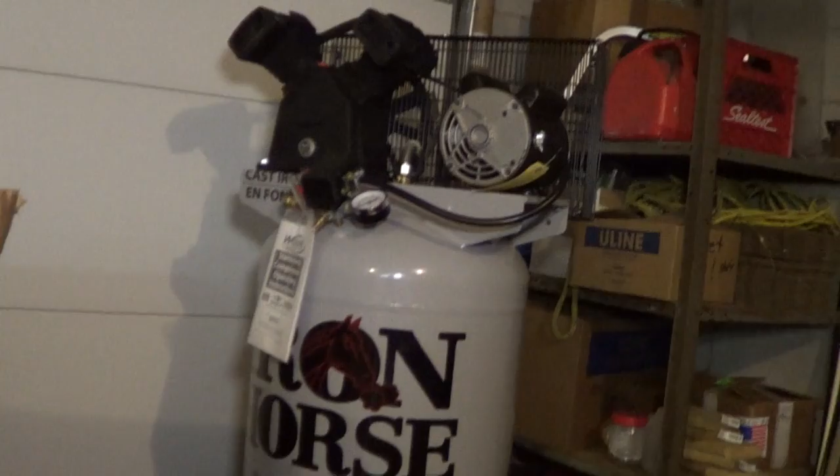My local TSC store, farm supply basically, had these guys on blowout, and so I got it for 35% off. Cannot complain. Retail $800, got it for $500. Love it. So I got to get the electrician to come in tomorrow because it runs on 240 volt.

He put in that breaker box over there when I got the Tormach, but he only put in plugs on this side of the wall. And I want to put the air compressor over here, so it's sort of away from me. And I'm not sure how loud it's going to be. I'm hoping it's going to be a little bit quieter than the old one.

So if it is still quite loud, we'll build some sort of box for it. Keep the noise down a little bit. Egg cartons and all that. So yeah, I got to get the electrician to put some wiring here somewhere.

Hey guys, so I'm in my office right now trying to figure out how to get the most out of this piece of damascus. This stuff is very expensive, so you want to get as much as you possibly can out of one piece. So here in my CAD program I've laid out the piece of damascus. It's about 15 inches long by 1.8 inches wide.

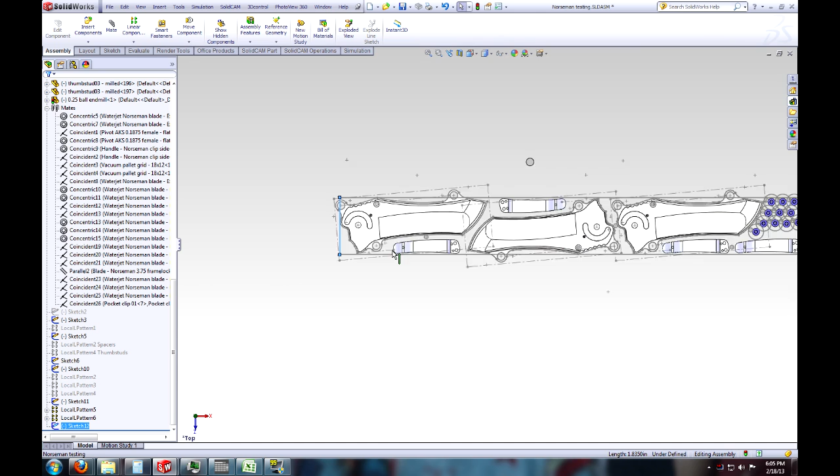And you can see I've been able to stuff 3 blades and 4 pocket clips into this piece as tightly as possible, and here's a little circle that dictates an 1/8 inch end mill, which is pretty small to be doing all this with, but it'll be fine. I'll just cut really slow and make it work, because using a bigger end mill just wastes more metal. So I'll cut everything out with an 1/8 inch end mill and make it work.

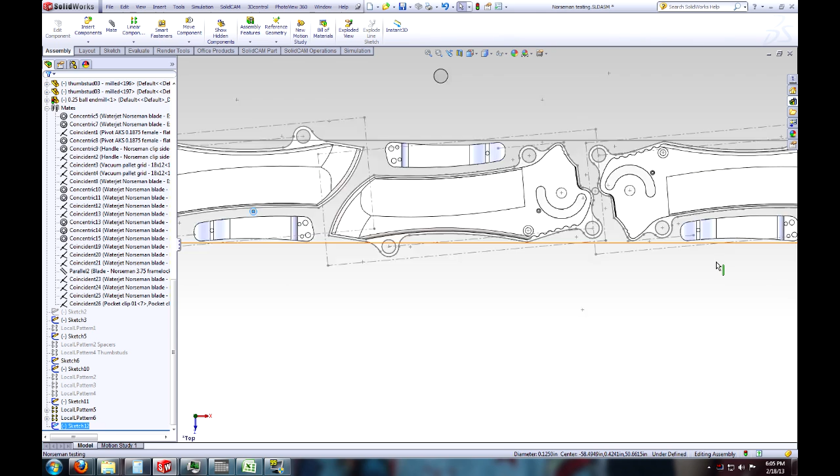And then over here I have a bunch of thumb studs. I'm going to try a new way to make thumb studs out of flat material as opposed to out of round material. These aren't actually finished yet. But, yeah. Pretty excited to try that out.

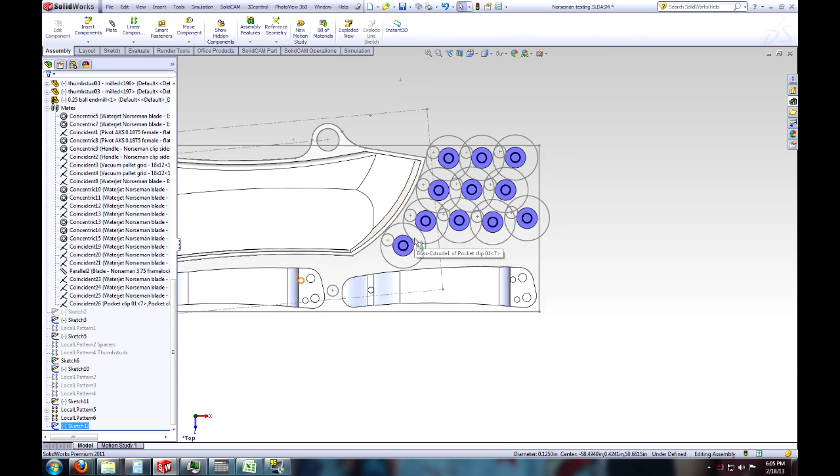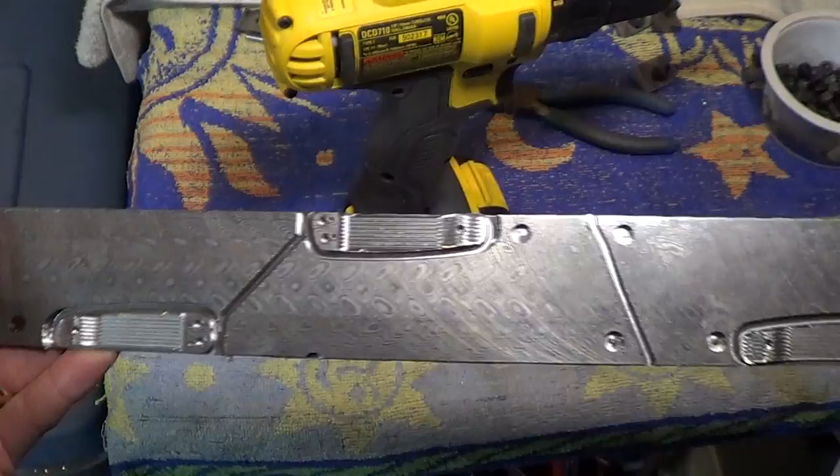So that's that. I'm just going to write some code to cut everything up and then head out to the garage and do it. As you can see from the CAD files, I tried to stuff as much onto this piece as possible, and it worked. So I got 4 pocket clips, 3 blades. A blade will basically go like that. And I've also got a whole bunch of thumb studs.

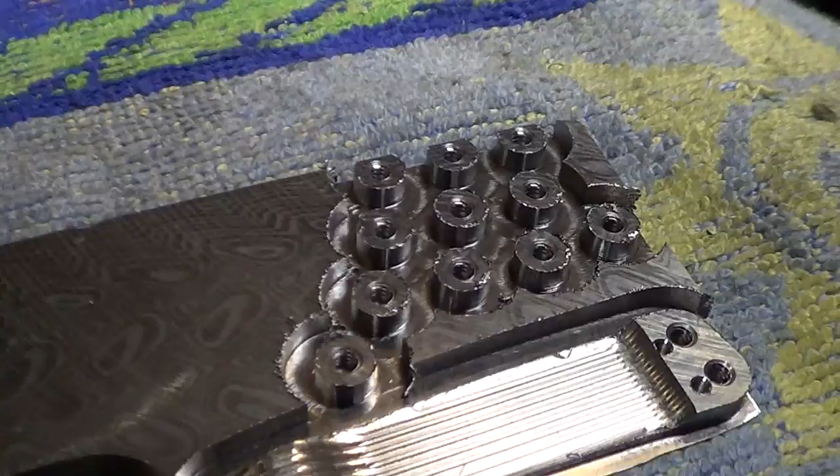Now I'm doing thumb studs a completely new way, same for pocket clips. I figured out how to make them from flat bar, basically. Drill a hole, mill it to the right diameter, thread mill it, profile it. Because I was using the vacuum table, I couldn't profile all the way through. But then I can break these off, because there's about 10 thou left.

So I can break those off and then thread them into another fixture from the back side, so that they'll thread onto the fixture kind of like that, and then I can machine the top of them. That will be in a future video, hopefully very soon, within a week or two. I'll show how I do that. Same story with the pocket clips.

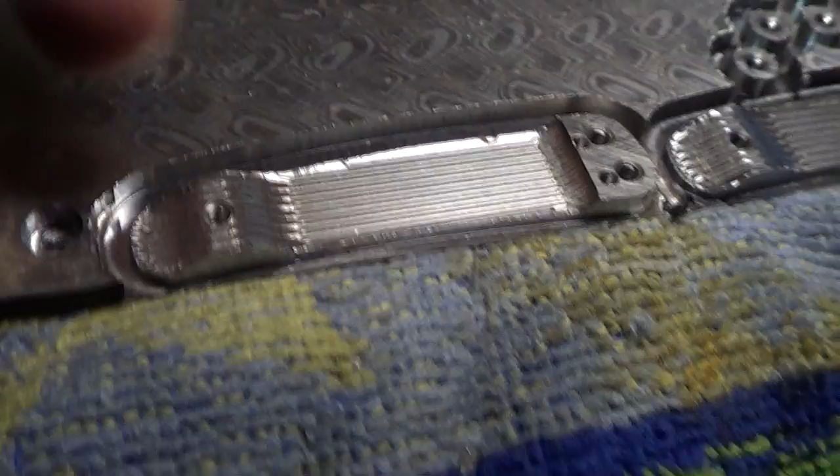I was able to successfully thread mill all of these holes into stainless steel. Very excited that I finally got thread milling nailed. If you saw my video from a couple weeks ago where I absolutely failed at thread milling, basically I was trying to do tiny external thread milling, and that's just stupid, because I was trying to make a screw by thread milling.

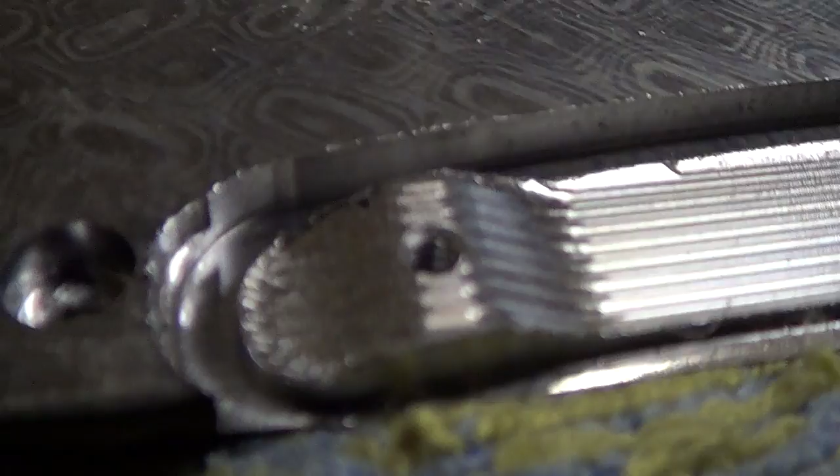Use a lathe. But for internal thread milling, if you get the code just right, it works like a charm. You can see those threads inside there. They are awesome. And I've also changed the design of the clip to use 2 little 1/16 inch pins to keep it positionally stable. Because even on my knife,

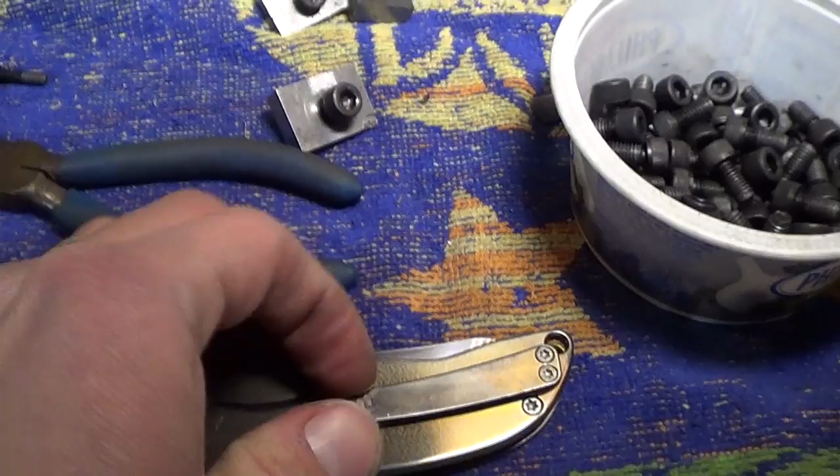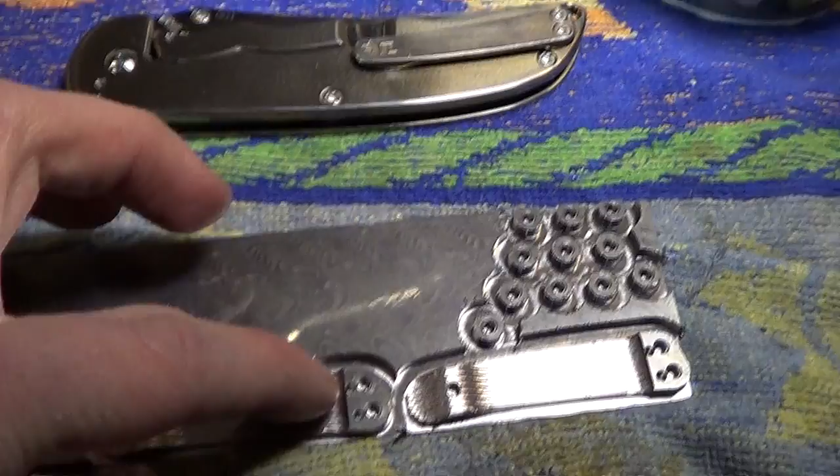the clip can move a little bit, and it's tight. I mean, it's hard for me to do this right now, so it doesn't really happen during normal use, but just the way the screws are in there and all that. But using pins like that will add a lot more stability to the clip, and it just won't ever get loose and wiggle like that.

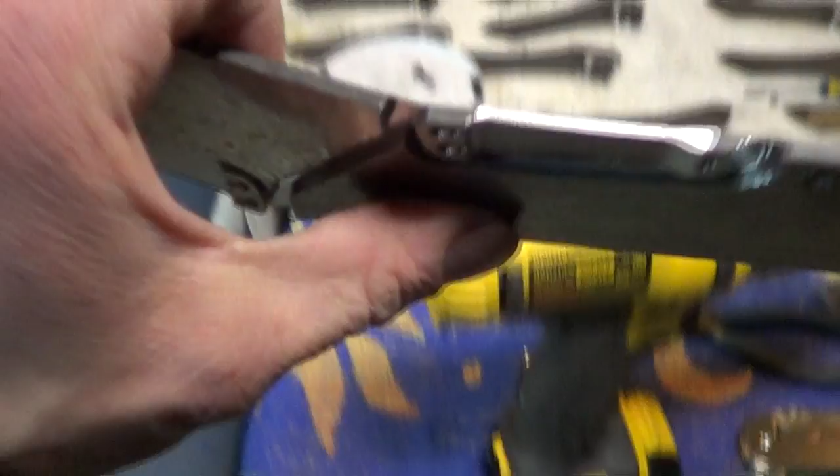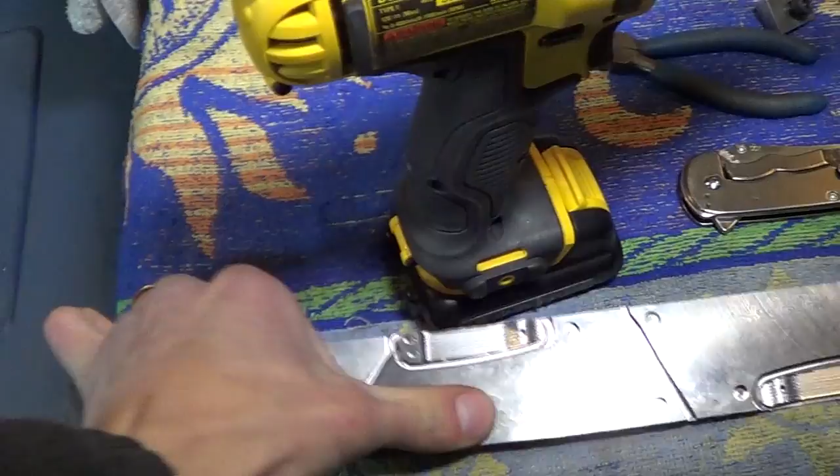Probably going to cut myself doing this one-handed on camera. I've done that before in like week, I don't know, 15 or something. Success. So yeah.

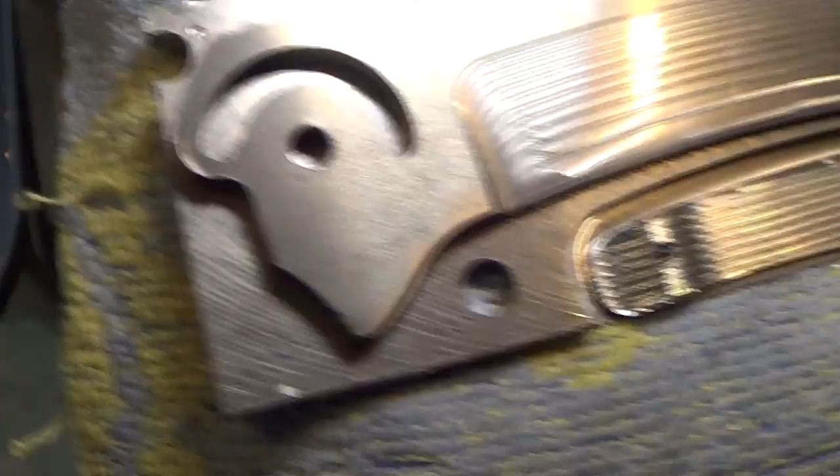So you can see I left just enough room to get the pocket clip in there and the blade all the way around. Just enough. I think I planned it perfectly. So, what next?

Eric's been a madman at sanding all these blades and Scotch-Briting them and finishing them up real nice. Over here we got our Scotch-Brite set up. If you work with metal and you don't have one of these, you are missing out on life. This is a 6-inch 3M Scotch-Brite wheel.

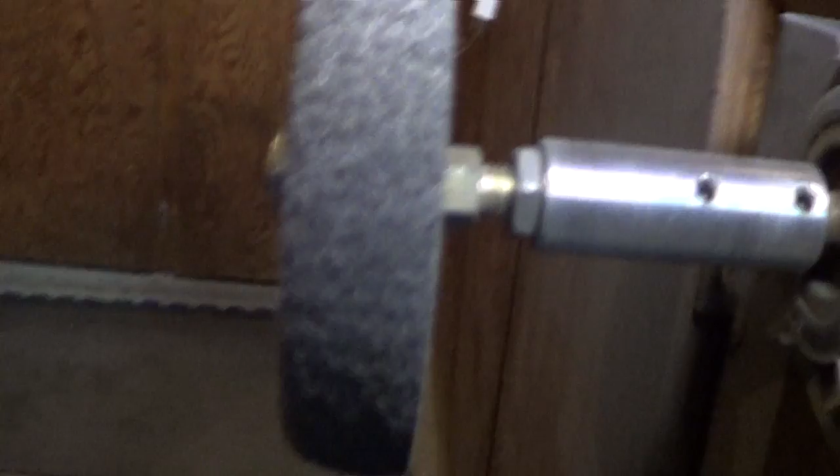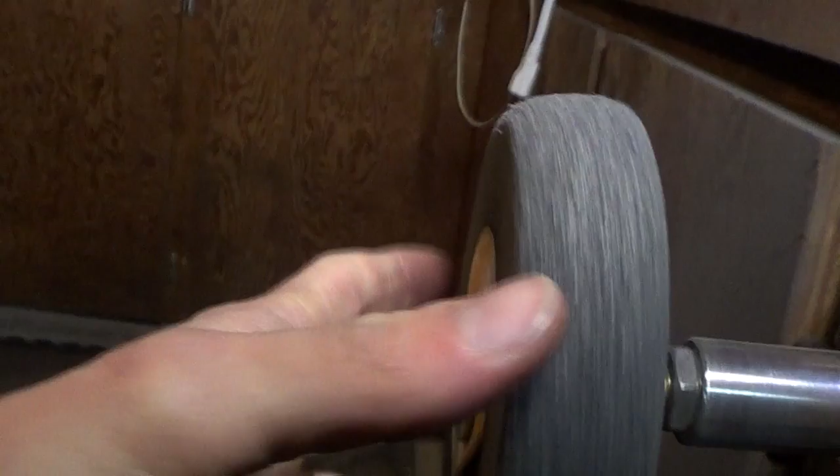And we've had this thing for about 10 months now. You can see we've worn a good radius into it. That's okay, it still works awesome. Yeah, it's probably down to about 5.5 inches now, but man, this thing is just so amazing. Aluminum, stainless, titanium, steel, it doesn't care. It just loves it.

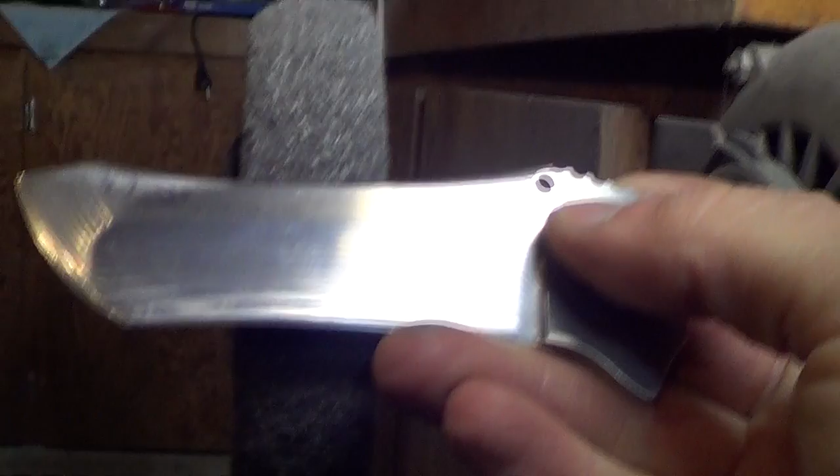So, Eric's been, you can see some of these blades, we had it undercut the corner rounder up here where my thumbnail is. Sort of caused some problems, so we got to blend that out, sand it down a little bit, and then blend it in with the Scotch-Brite.

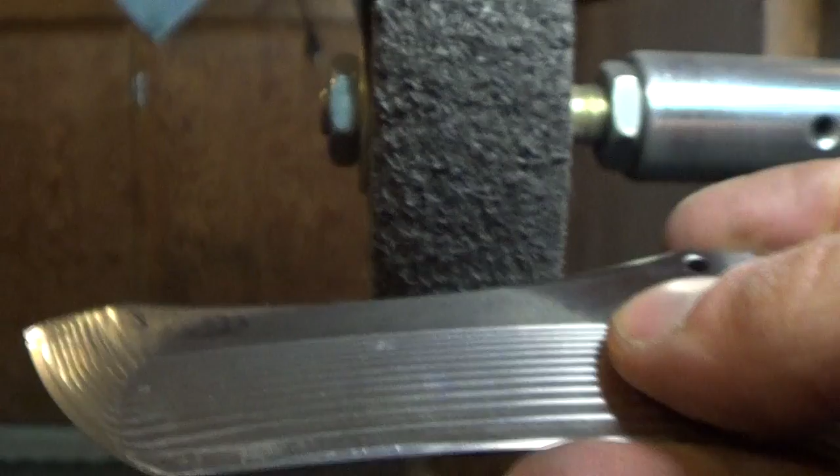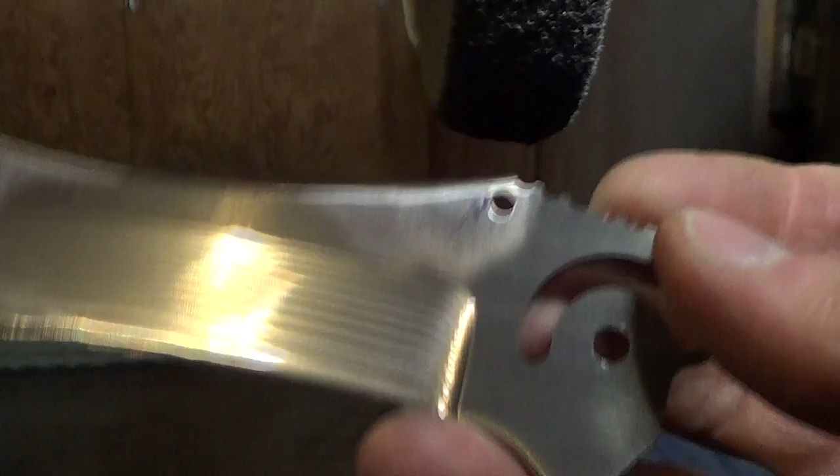And then all these jimping holes here. I'm not a fan of super aggressive jimping. I know a lot of people are, but so what? This is my knife. It's going to be exactly the way I want to make it. So I make them pretty aggressive right off the machine, but then we kind of blend them in so that they're still there and functional, but not grippy, like not super ouchy.

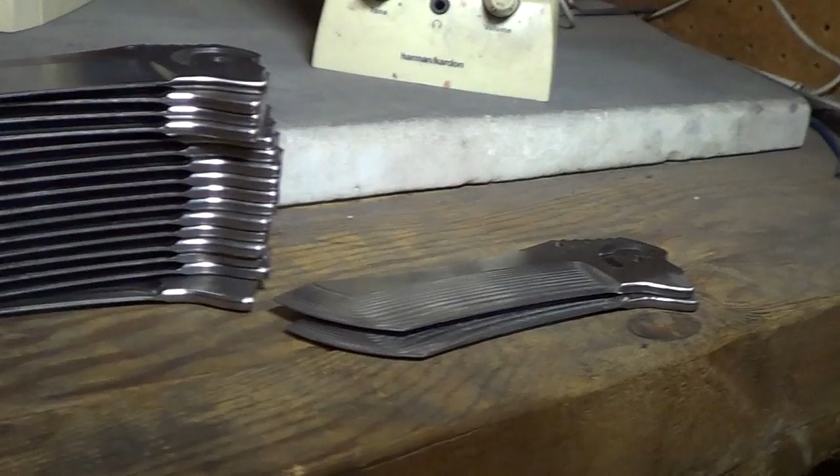Because I like knives that are smooth and sleek and functional and comfortable. Something you just want to keep in your hand all day long and flip and fondle and have fun with and show off. That's kind of my idea of a cool knife. So yeah, Eric's got a whole bunch of blades he's been working on.

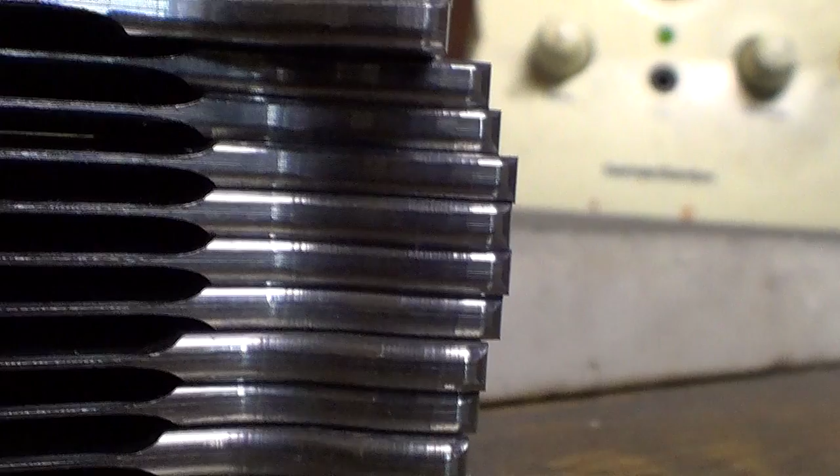There you can see all the milling marks left over. I mean, we got them down pretty tight, so there are very little milling marks. However, they're still there, and that's perfect Scotch-Brite territory. Here at the top, I just put one on that has been Scotch-Brited already, and hopefully you can see the difference there. Looks like those top two have been. So it does make a huge difference.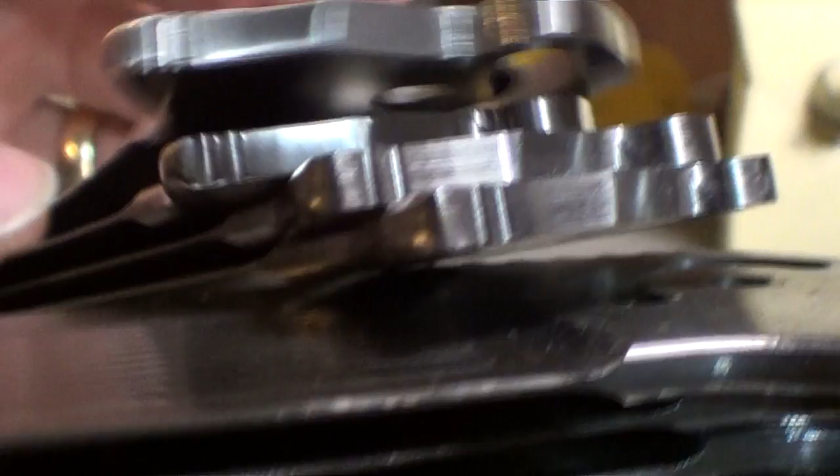Same for the flipper jimping. Yeah, those top two have been, and the bottom two haven't, and you can tell the difference. So yeah.

I don't know if you can notice, but I'm just kind of rambling. Looking for something to talk about.

Alright, here's something cool. These are Kyocera O-flute. O-flute or zero flute? I think it's O-flute. That's the designation.

I should probably put this thing on a tripod. Make my life a lot easier, but...

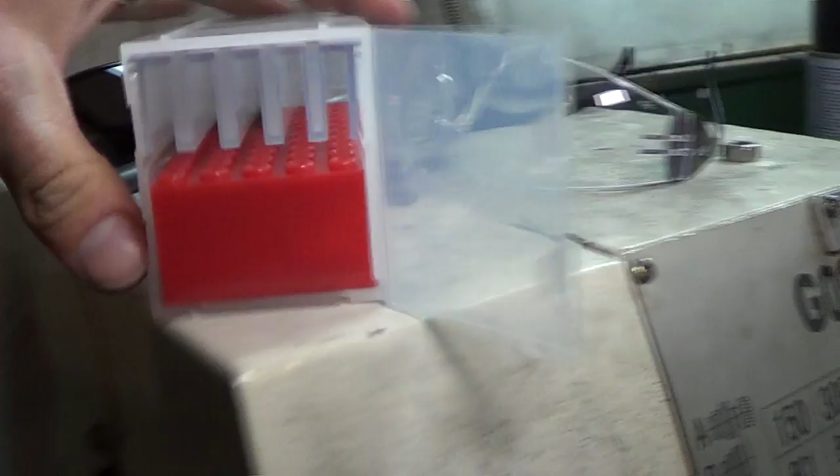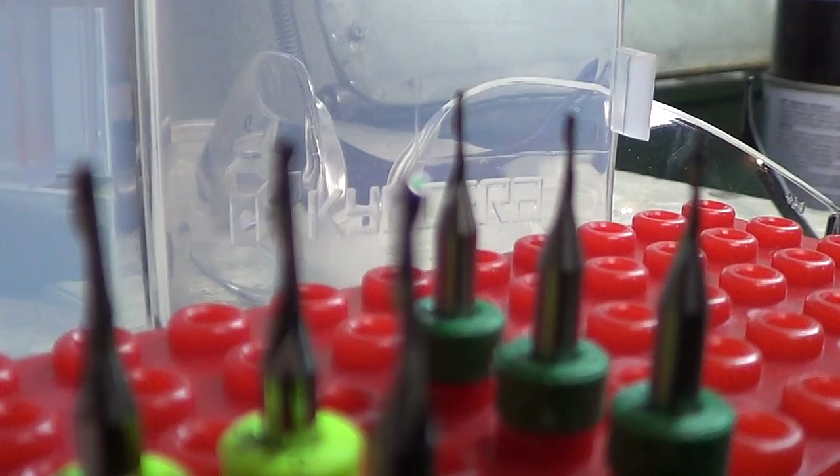Okay, I got these guys on eBay, thanks to a tip I got from another machinist. These are called single flute endmills. Now most endmills have 2 or 4 flutes. As you can tell, these just have a single flute. The yellow ones are 1/16 inch, and the green ones, I guess, are 39 thou. 0.0394. I think that's a metric equivalent.

And single flute endmills are great for plastic as well as aluminum sometimes. Now I'm going to be using them for nylon, because if you follow my stuff, you know that I use ball bearings on the pivots of my knives, and I'm going to start making my own ball bearings, my own cages, from a sheet of nylon.

And I've done some testing with this, but with a 4-flute end mill, it leaves a terrible surface finish. And so apparently using a single flute end mill makes a much cleaner cut and much better surface finish, and I wish I had one here to show you, but it's inside my office. So that's the end of that.

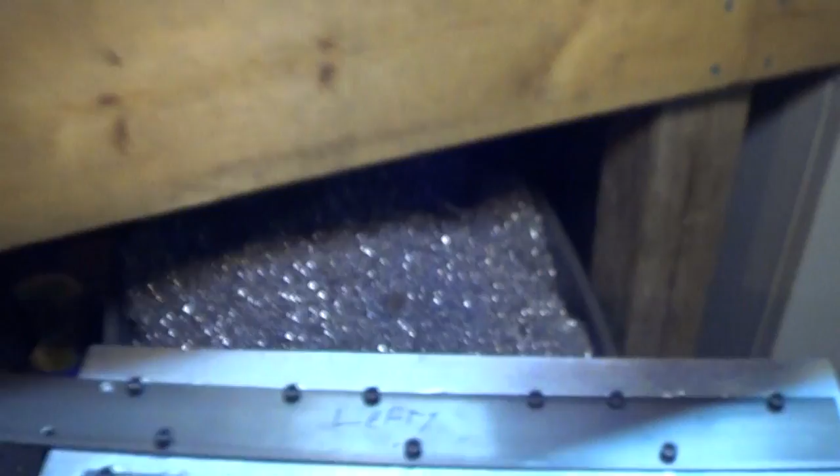Alright, what else can I ramble about? So we have 65 blades in total to make. Most of them are done. There's those 3 Damascus ones I'm ready to machine soon. I'll do that first thing in the morning. And then there are 5 more blades here that are going to be my lefties.

So the first operation roughs it out. So after the first one is roughed out, this one's going to fall off. And then I'll stop the code, I'll pull this off, and I'll bolt it here. And that way I can just run 5 of them in one setup, as opposed to doing this last guy by itself.

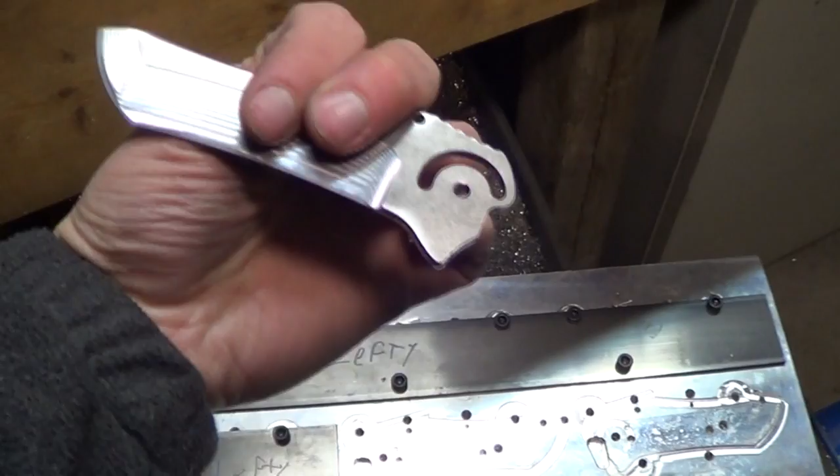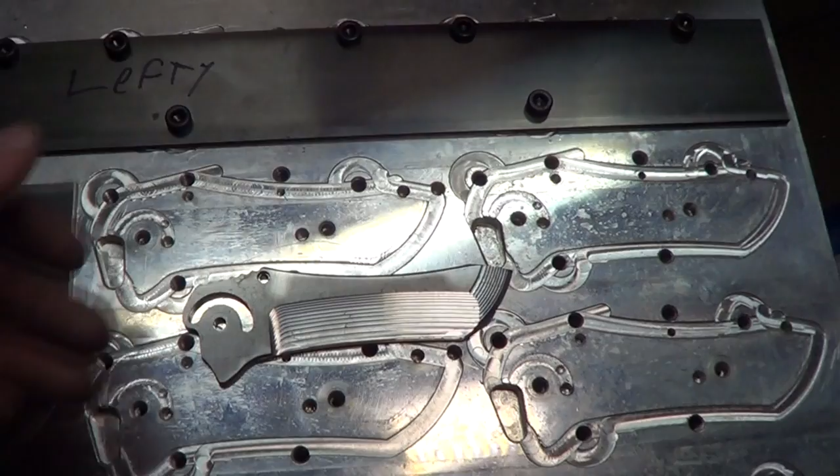So to do a lefty code, pretty much everything is the same except just flipped. I'm making a true left-handed knife with the thumb stud on the left-hand side and the lock bar on the left hand and everything. And it's more work than I thought it was going to be to flip all the codes, because if you don't know much about machining, this doesn't just happen by itself.

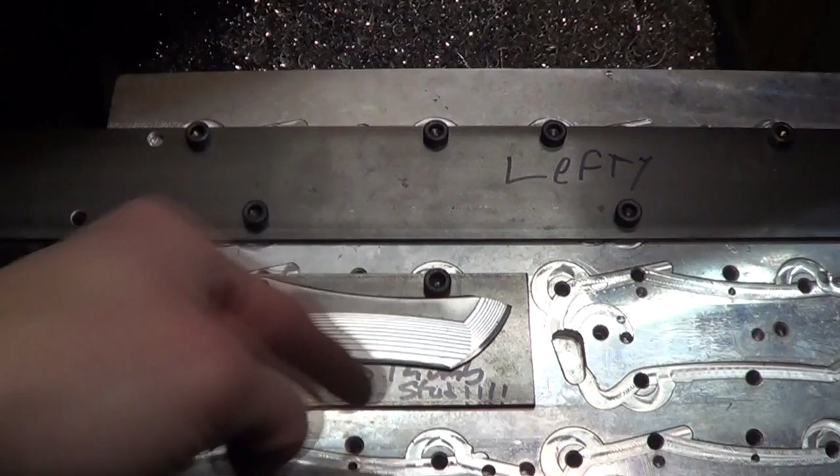For a piece of metal to become a blade, I have to choose the outer profile for all kinds of different roughing, semi-finishing, finishing passes, drill, blah blah blah. Every single part that's machined on this has to be specifically chosen. It takes 10 tools to do this to a blade. And pretty much every one of those operations has to be done again on a mirror image of the blade.

So basically like that. So I have to choose all the new tool paths, all the 10 tools, and code them and program them to do the same thing again. The only thing I could reuse was these 3D milling, rough it out, you know, the bevels. But that's cool.

So yeah, tomorrow morning I'm going to finish up the Damascus ones and these lefties, and then all the blades are done. Like I said, Eric's been Scotch-Briting them and sanding them, and then we'll get them off to heat treat very, very soon. He's been making really good use of the disc sander.

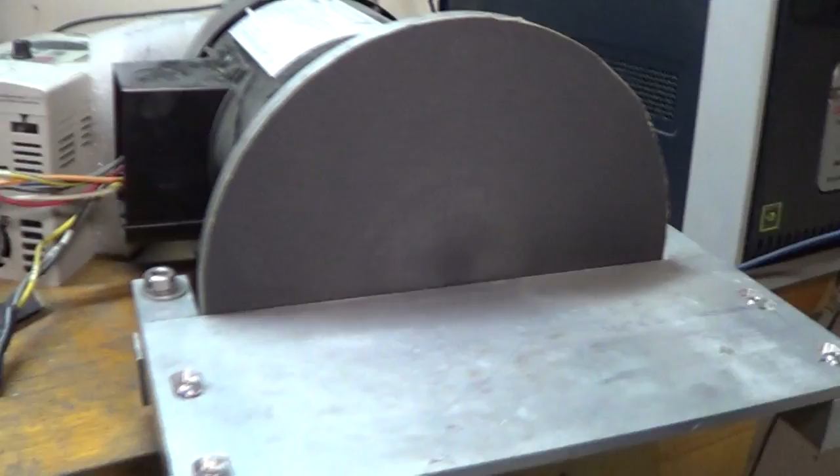For the last batch we had some problems getting this to work, and it turns out we were just using crappy sandpaper. Sort of no-name stuff, cheap, it looked like a good deal, so I got a box. I probably got a box of 50 sheets for about 25 bucks or something. And that sucks. So there are two kinds of sandpaper that are supposed to rock the house. Well, one specifically, but I won't get into too much detail here. Maybe Eric will in the next video.

But this stuff, Norton Black Ice, is supposed to be the shizzle for doing blades. It's meant for wet sanding on automotive paint. So you'll find it in automotive paint stores, the people that actually sell the supplies for painting cars. Norton Black Ice, wicked awesome. I got a box of 50 sheets for I think $42.

You can get them cheaper online. That was local prices. So this is 600. And I was also looking for 220, but they didn't have it in Norton. So they had 3M wet dry 220. I mean, anything really good brand name is going to work well.

The Black Ice is supposed to be awesome, but Eric's been going through these, and he was saying he can get about 3 blades per sheet before it starts to take longer than it should. Like, you start to notice how long it's taking. And yes, it still feels very sharp and it still works, but he said it goes from taking a few minutes a blade to 5 or 10 minutes a blade.

And at that point you just pull it off, toss it, and put a new sheet on. And it's worth it to go through sheets, to save the time, so that you're not just putting excess heat into the blade. But yeah, I'm sure when he gets back, he'd like to explain a little bit about that.

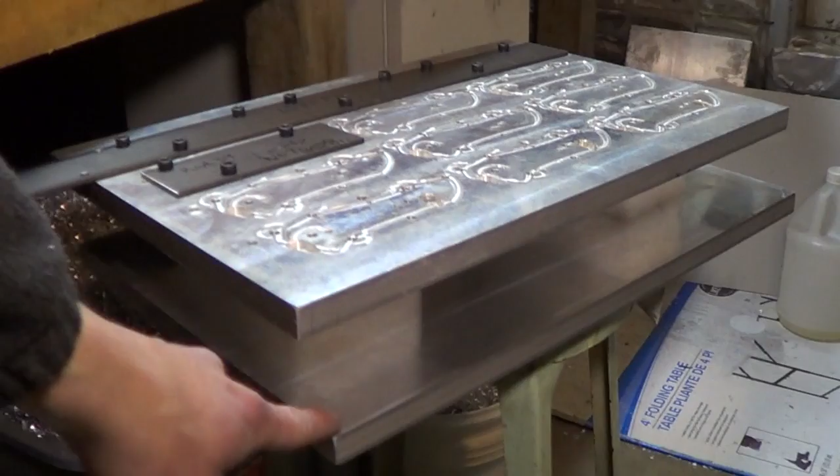So, I don't know if I'll get to film it, but another thing I got to do in the next day or two is make my handles fixtures. That's what all these guys are for, as well as this lower one. So the handles fixture is going to be pretty cool.

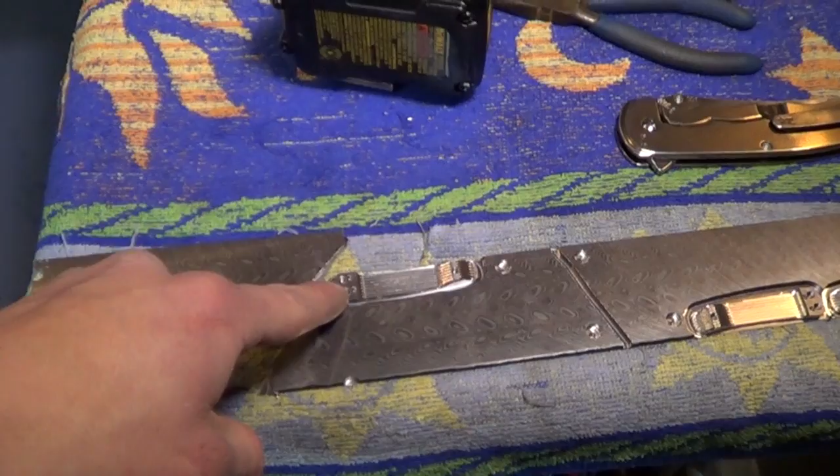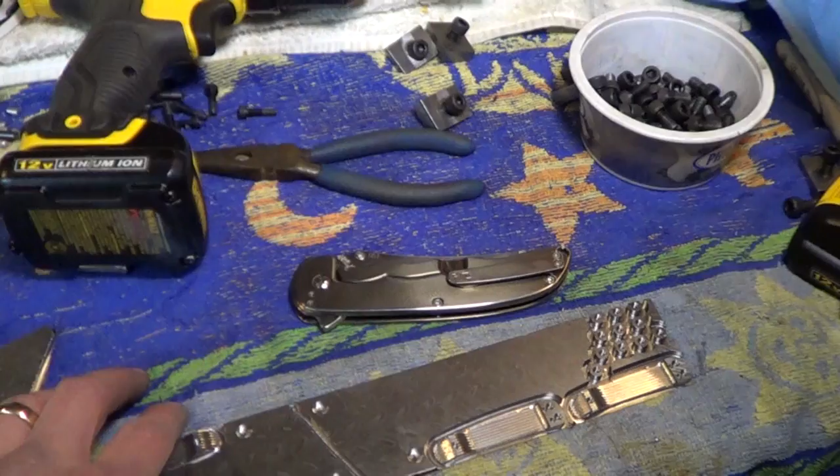Handles and clips. Just like the pocket clips that are threaded in from the backside, the handles are also going to be threaded in from the backside so that they get threaded down to the fixture really nicely. And that way the handles stay totally flat, and I can do all my topside machining in one operation. Which is kind of a kooky way to do it, but I'm pretty excited about it actually. So I'm pretty sure that'll be next week's video. I should have that done by then.

Anywho, that's about it for now. Maybe I'll film something more in the morning, but if not, it's more of just an update video rather than, you know, watch me make this cool thing. But something's better than nothing, so